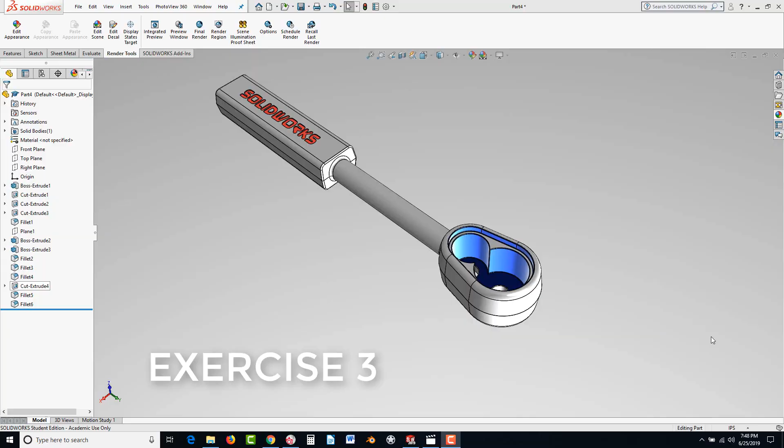Exercise 3, SolidWorks 2019. In Exercise 3, we're going to work on this forged ratchet body. Some of the features we're going to see are adding draft, as well as offsets, and making some additional features on here that you'll see, and some more filleting.

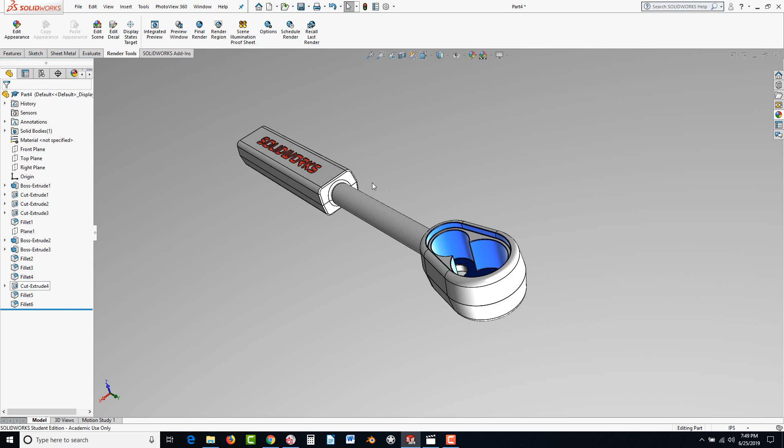So let's begin. First of all, this is what it's going to look like when we're done. We're going to start off creating the head, then we'll create the transition section. With that, we'll learn how to create a plane by offsetting one, and then we'll create the handle.

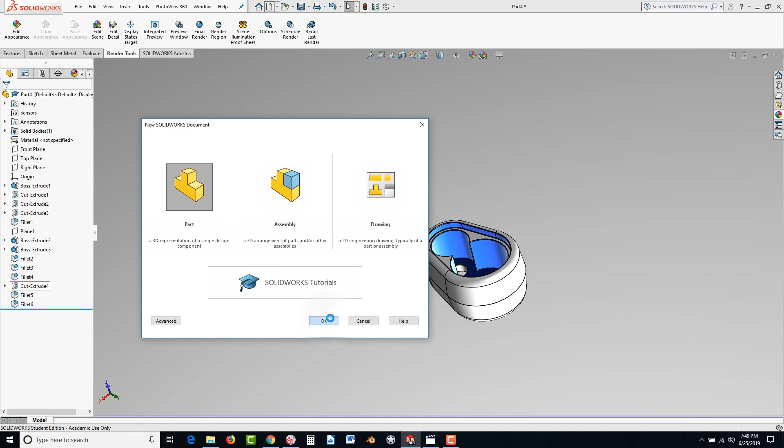Start off with a new part file. So go to New, Part, and hit OK. Select the front plane and start a sketch.

Select the centerline tool and glide over the origin. Click and drag up a vertical centerline about 1.5 inches in height, and then hit Escape on your keyboard. We're going to use this to mirror across the geometry.

Now, to make that head, most people draw multiple circles, draw the lines in, make them tangent, and snip it. This is going to be an easier method that I'm about to show you. Select the line tool, glide up to the left of that centerline, but don't infer to it like this. You want to get to the left of that a little bit, click, and drag a 1-inch angled line across like this. Make it look like mine if you can, then hit Escape.

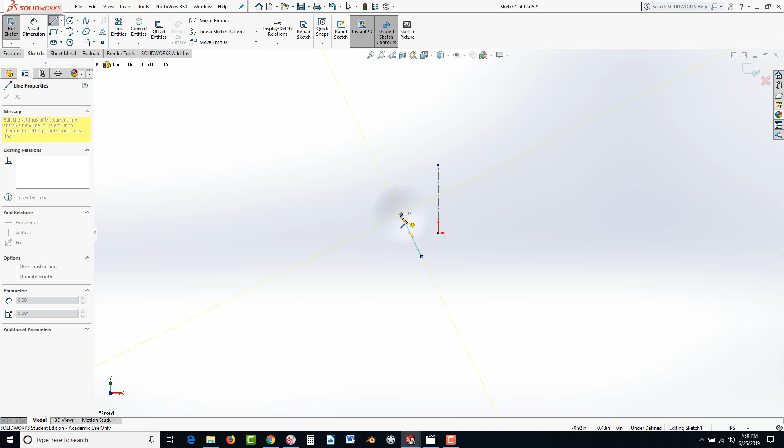Now, click and drag a fence to surround the geometry, so everything is selected, and use mirror entities. Again, we learned about mirror entities in Exercise 2.

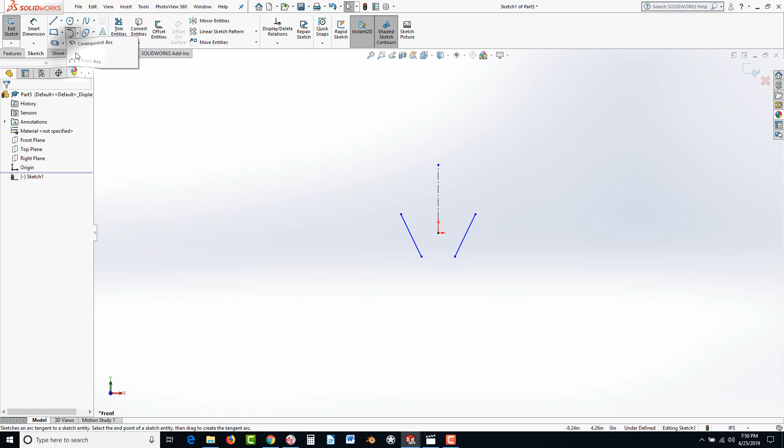Now I'd like to introduce you to the Tangent Arc tool. Find Tangent Arc, click on that. Tangent Arc automatically creates an arc tangent off of an edge, and you could snap it to another edge. We'll do that again over here, and get to this vertex, and once you get the orange dot, make sure you click. If you do it a little too quickly, sometimes you might leave a gap, so that leads to sloppy modeling.

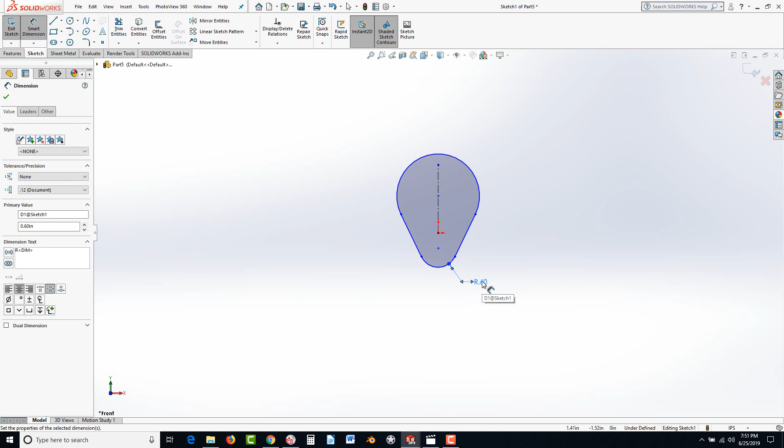So take your time, make sure you see the orange dot before you go ahead and click. Hit Escape. Go to Smart Dimension and dimension the bottom arc first. Actually click on the arc, not the center point of the arc. Move your pointer to the lower right, just like I'm doing here. Click and type in 0.6 and hit Enter. Now go ahead and click on this arc at the top, drag it up to the upper right corner just like mine, click and make that 0.75.

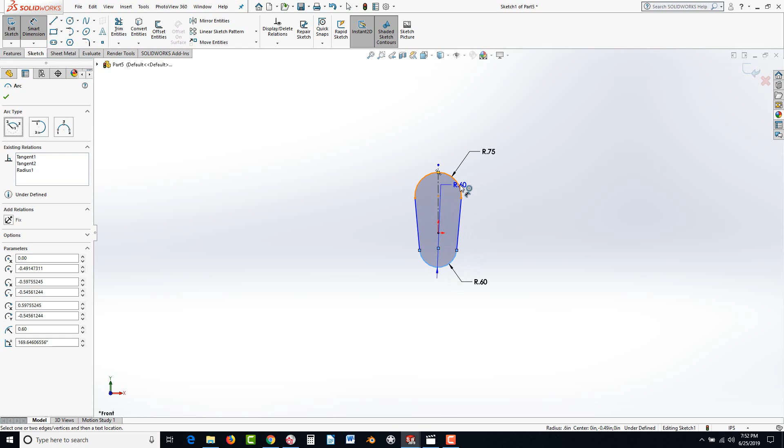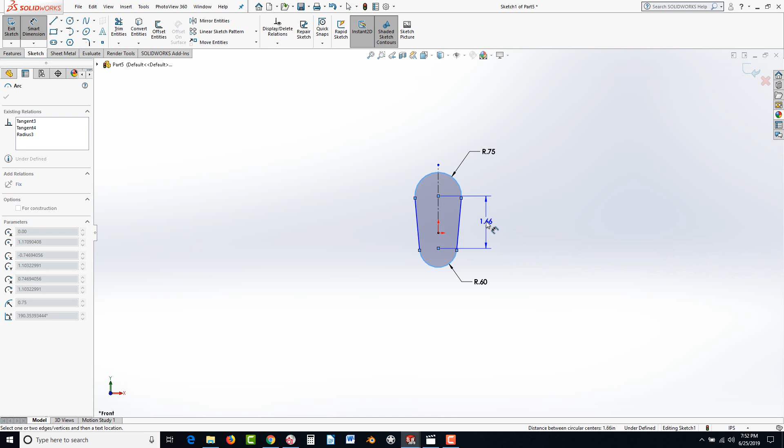Next, you could either click on both center points of the arcs, or click on the arcs themselves, but stay away from the midpoints of them. Click here, and here, when they turn orange. Move your pointer to the right and you'll see it should be dimensioning to the centers. If not, you can adjust it, but I'd like you to practice. Hit Escape if it doesn't work and try again, or just select the center points. Be careful not to select the origin, since our center point isn't aligned to it yet. Make sure you get the dimension between the extension lines, make that 0.75, then hit Escape to exit the dimension tool.

Let's hit F on our keyboard for Zoom to Fit. Now what we want to do is snap this bottom point of this arc to the origin, because the origin is our anchor point. It's a good idea, otherwise it just kind of floats.

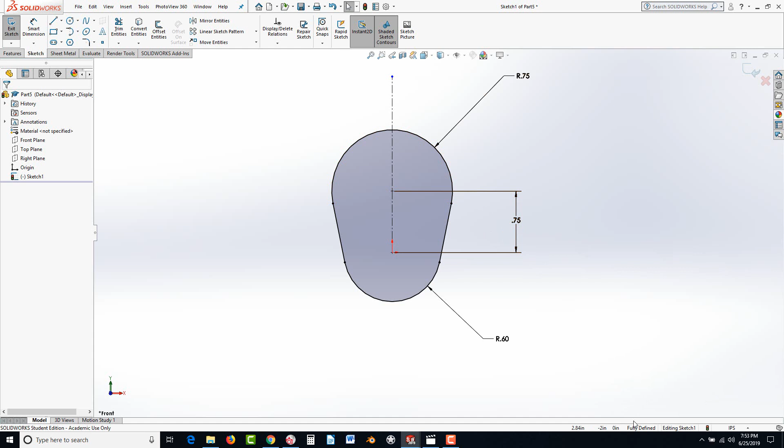In fact, if you grab that center point with your mouse button depressed and drag it down, you'll see it's floating. Go ahead and drag it up and let it snap to the origin. If it's not a very far distance from the origin, zoom up closer, because SolidWorks doesn't pick up on very tiny little moves, it just assumes you're not moving it. So be aware, make sure you lock that in. Once it's locked in, you'll see it all turn black, meaning it's fully defined, and you can see down in the lower right it says fully defined.

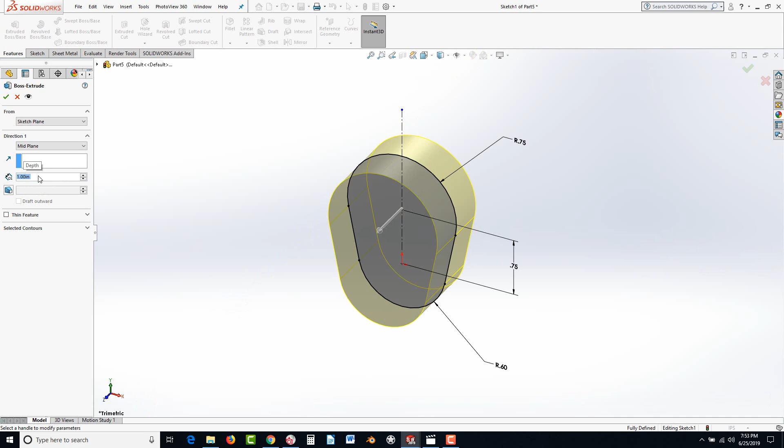We're ready now to go to Features and Extruded Boss Base. Instead of blind, let's have it go mid-plane and set it to 1 inch thick. Oops, I accidentally hit 11 inches, didn't want that. Just type in 1 and hit Enter, and you can see it's extruding on both sides of the plane.

Now, what are the advantages to extruding on both sides? Well, with symmetric parts, as I discussed earlier in Exercise 1 and Exercise 2, it's great to lock everything into the origin. You have planes to mirror across, as you saw with our ribs in Exercise 2. So there's definite advantages to take advantage of.

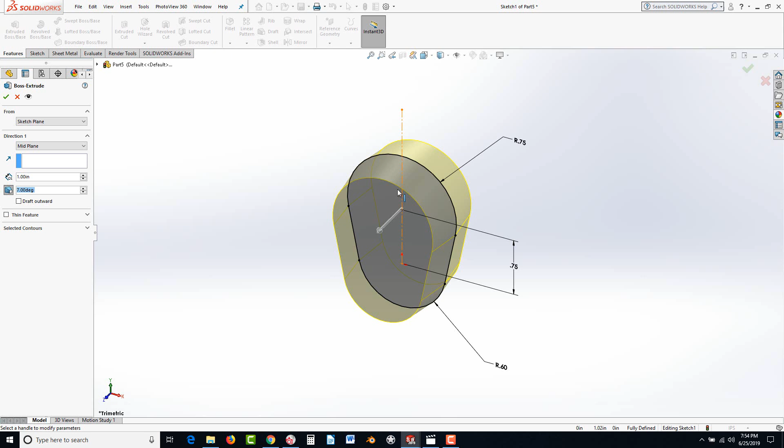Now we're going to add draft. Go ahead and click on draft on, and either type in 7 degrees or bump it up with the arrow key to the right, and you'll see that it's adding draft while it's extruding. Now it's getting smaller.

Note that if you turned on draft outward, it would get thicker. But turn that off—we don't want that.

This is for a molding process, or in this case, a drop forging. Imagine an ice cube tray—you'll typically not see one without any draft applied. That's because once the ice is solidified, you try to break it away. If it were flat on all sides, it wouldn't come out easily. So they add draft so that as soon as you move it a little, it comes out easier. That's what they do with plastic parts as well as cast metals.

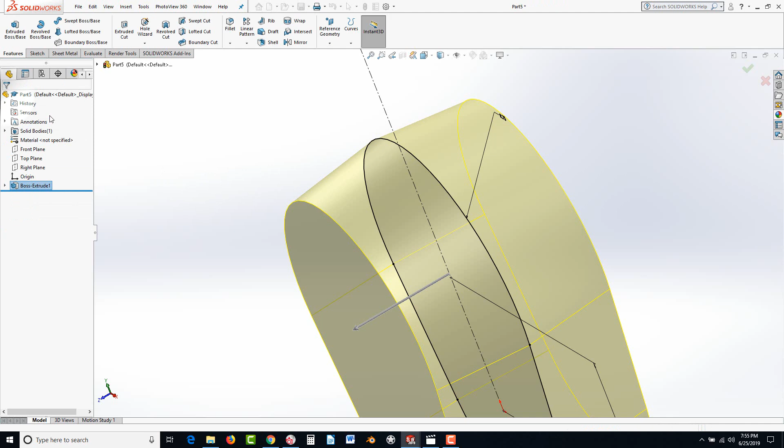So let's go ahead and hit the green check mark. Hit your spacebar, go to isometric, and click somewhere on the screen.

Now we're going to learn about the offset sketch tool. First, we have to start a sketch, and we're going to sketch on this surface. Click on the surface and start a sketch. While the surface is still selected, it will pick up on the topology when we go to offset entities. Find offset entities up here, click, and type in 0.125, but then check the reverse box.

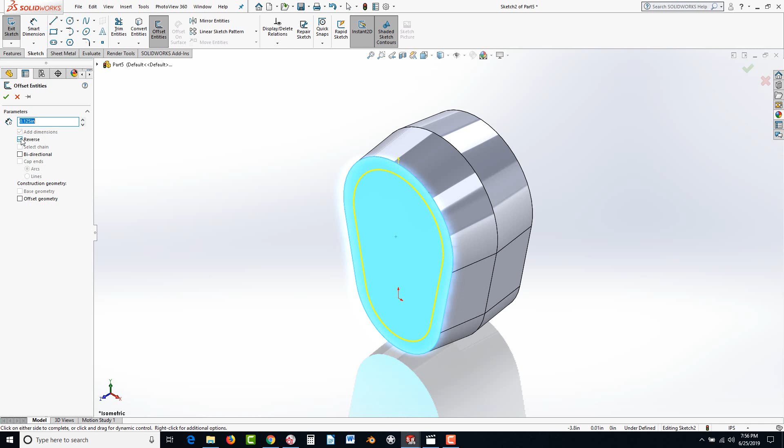It's very rare, like with some of the older CAD systems, to be able to put in a minus or negative value. In SolidWorks, there's usually just a flip switch, so you don't have to deal with negative numbers typically, though in some cases you can. Anyway, make sure the reverse switch is checked, and you'll see the preview in yellow. Go ahead and hit the green check.

Now, what we're doing with this offset is making a recess into the part for a cover plate. So let's go to Features and Extruded Cut. We're going to remove the material—0.125—and hit Enter. Go ahead and hit the green check mark, and now you have a recess.

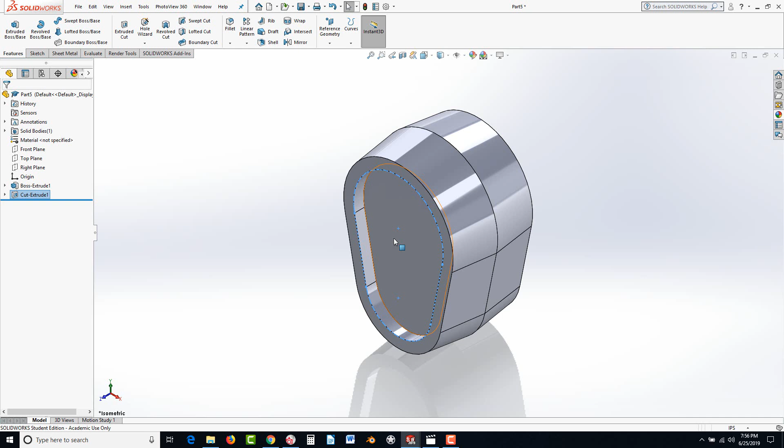Now, the floor of that recess will have a reduction gear—a gear inside there—in an assembly later, not in this lesson, along with some mechanisms essentially inside there. So we have to make some cutouts, a pocket per se. Click on that face on the floor and start a sketch.

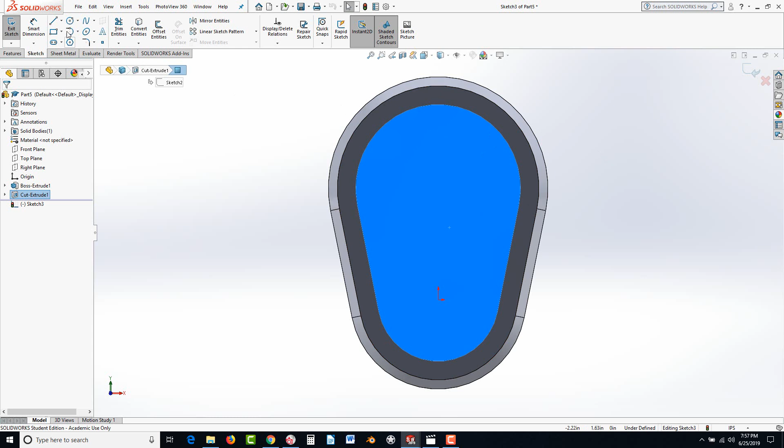Now let's hit our spacebar, and I'd like to select normal to, just to get the hang of it. What normal to does is bring you normal to whatever surface, no matter what angle it's sitting at, making it very easy to sketch planar to the screen.

Let's go to the circle tool, and we want to find the center—that's the origin right there. Click and drag out a circle about 0.35-ish. Click. Now you'll notice there's no center to lock in up here.

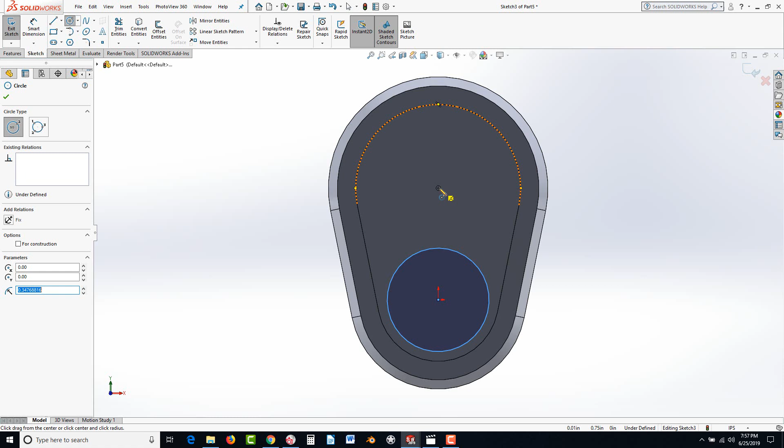It is inferring to a quadrant, but that's not good enough. Here's what you do: move your pointer to one of the arcs or radiuses at the top—could be any of those—and let it float there for a moment. A second or two later, you'll see a center point appear. Move your pointer away from the edge, and now you can go to that center, click, and drag out a circle.

Your circle's radius should be about 0.55 or something like that, or 0.6 if you want. That might be a little too big, but go ahead and click.

Now we're going to take a look at the trim tool—we briefly looked at it in the last exercise, but let's give it a shot again. Go ahead and click on Trim Entities. Now you'll see there's a variety of tools. Two of my favorites are Power Trim and Trim to Closest. Let's try them both. First, let's go with Trim to Closest.

Trim to Closest enables you to hover over whatever geometry you don't want, and it will automatically trim up to the next intersections. As I'm hovering over this particular edge, it's highlighted in a magenta color, and that's what's going to be removed when I click. So go ahead and click.

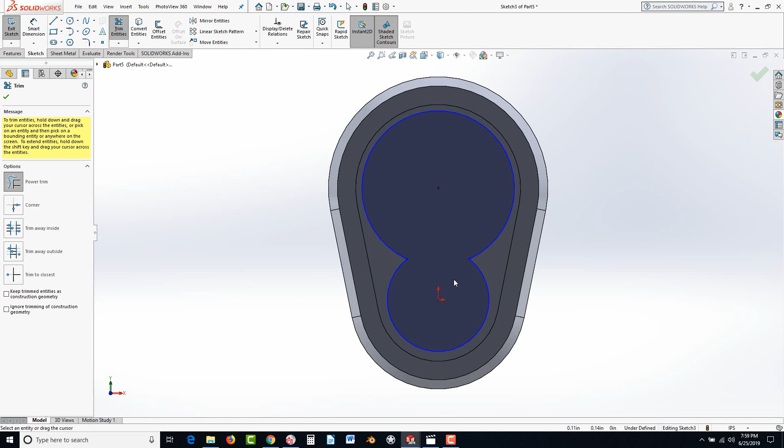Now let's try the Power Trim. Go ahead and select Power Trim. Power Trim is great for multiple profiles that you're trying to cut, so in this instance it's not really necessary, but it is a nice tool. Simply move your pointer up here somewhere floating and click, and notice as I'm holding down the left mouse button, it's scribbling through, and watch as it removes whatever it touches, cutting it up to the next intersection, or trimming it up to the next intersection. So those are two very nice tools to select. The other ones in between can be useful for patterns and such, but we're not going to go over those in this segment. Go ahead and hit the green check mark.

Now go to Smart Dimension and click on this bottom arc. Click to drag it out and drop it. Click again and type in 0.35. Now notice that's a radius, and if this is going to be machined, it might be healthy to actually have the diameter so they could pick an end mill and a reamer and so on for the proper size. And with that, you could always change it pretty easily. Notice it says 0.35 radius here.

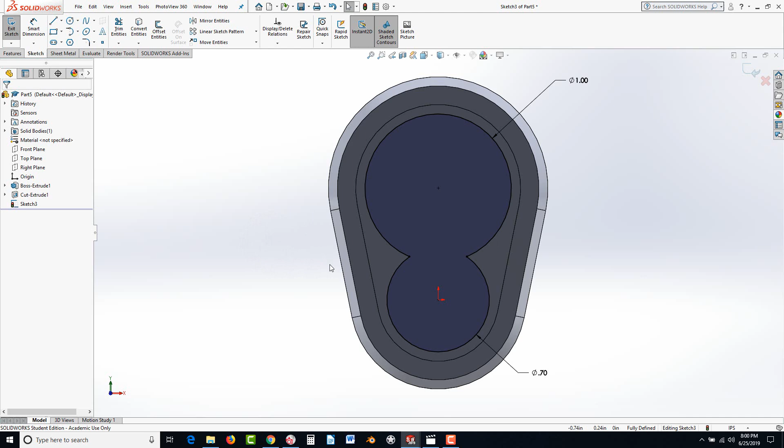Go to the far left side and go to Leaders, the tab up here, and you'll see the option to change it to a diameter. It automatically doubles it up, and you're ready to move on to the next. Go ahead and select this arc now, drag it up to the top, click, and type in 0.5. And again, if you wanted to change it to a diameter, go to Leaders over on the left, and change it to diameter. Hit the green check.

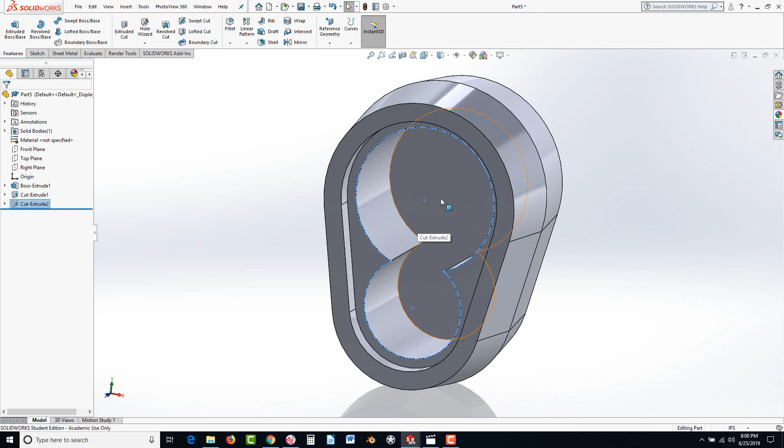Now rotate it a little bit, and let's go to Features, and go to Extruded Cut. We want to cut this at a depth of 0.7. And there will be no draft because this is a machined entity. So hit the green check.

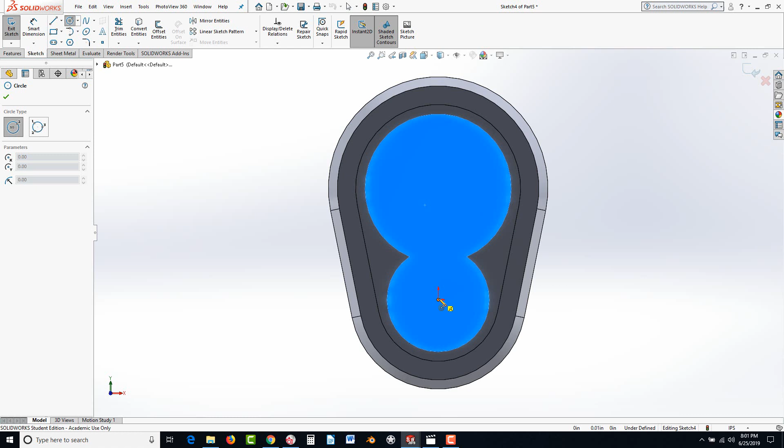Now the floor of that pocket that we just created, let's go ahead and click. We're going to put some through holes in there. So select this face, start a sketch, and again hit the space bar, and you could go normal too. But if you like, you could hit Control 8 - that's the fast key, some of you like fast keys. Go to the circle tool, and we're going to draw holes.

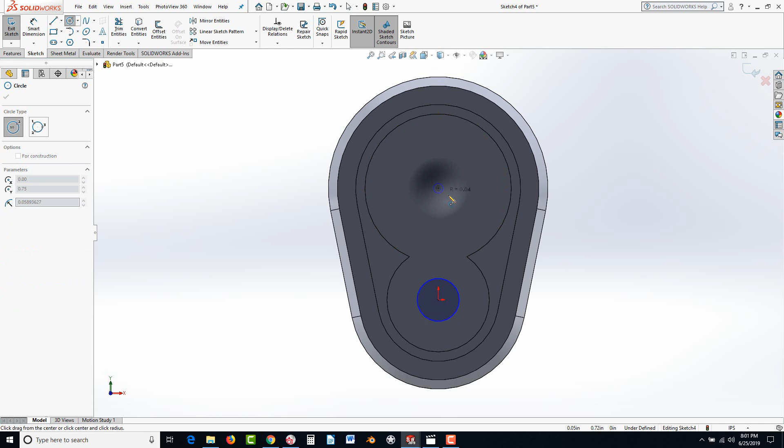Now there is a hole wizard, but we're not going to learn that until the next exercise. So glide up to this point, drag this out, click to drop it. Don't worry about the size too much. Now this one over here, again we have trouble finding that center, although it did pick up on it pretty well. If you don't get it, remember the trick is to get to the arc and let your pointer hover over it for a moment, and it will show up. Click and drag this one out and hit Escape.

Now go to Smart Dimension and dimension the bottom circle, and we're going to make that 0.35. Now we want to make this one equal to it. So rather than adding another dimension, let's have it controlled by one and hit Escape, and we will use a relationship as a substitute for a dimension. We'll make these two equal.

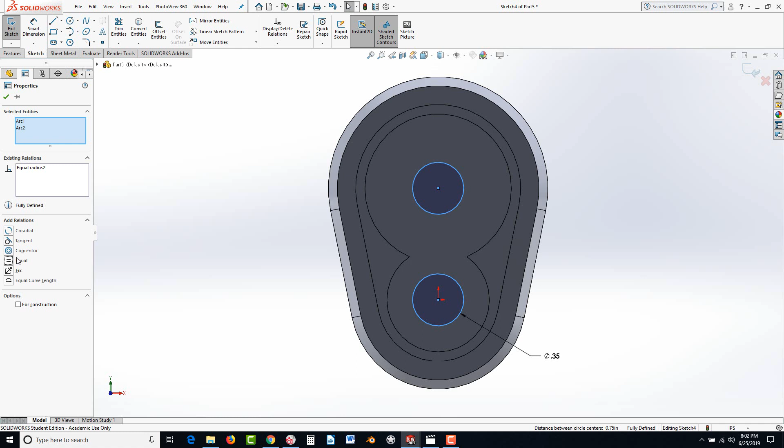The way you do it: after you hit Escape, hold Control, select this circle, and then select this circle. On the left, it will give you a series of options for constraints, or as they call it, relationships, and we want equal. Don't go with concentric - that will put them inside of each other, or we'll try, it will actually fail. But hit the green check. And now one dimension controls both.

Now note that in here, you could go ahead and click on the extension line of the dimension, and on the left you get some options. Now we've seen this before with the diameter symbol, but we could also click in here and either type in x2 for 2 times, or we could actually write a note, PLCS, period, for places, 2 places, or whatever you want to do. And you could also put in tolerances.

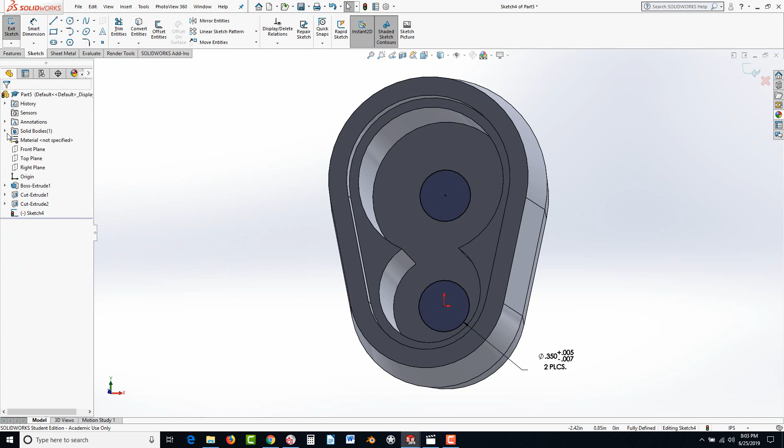So like over here, you have the ability to go with basic, bilateral, limit, symmetric, min-max, fit. And you could put the precision you'd like in decimal places and what you would like to see on there, plus or minus. And there we go. So you can change those things pretty easily and add them, so later on when you detail the print, they come up automatically.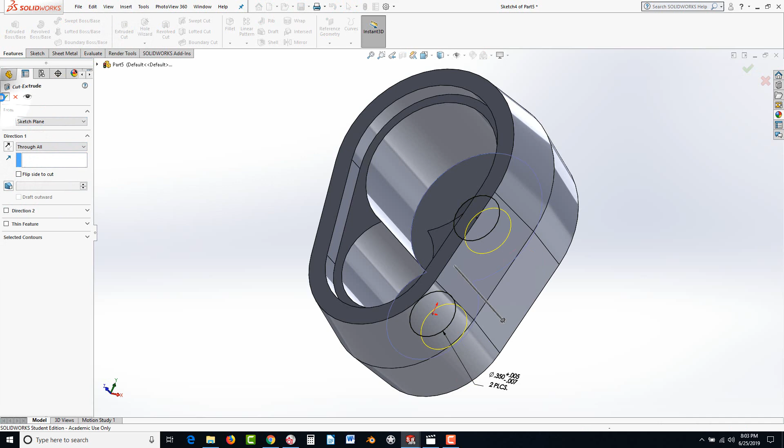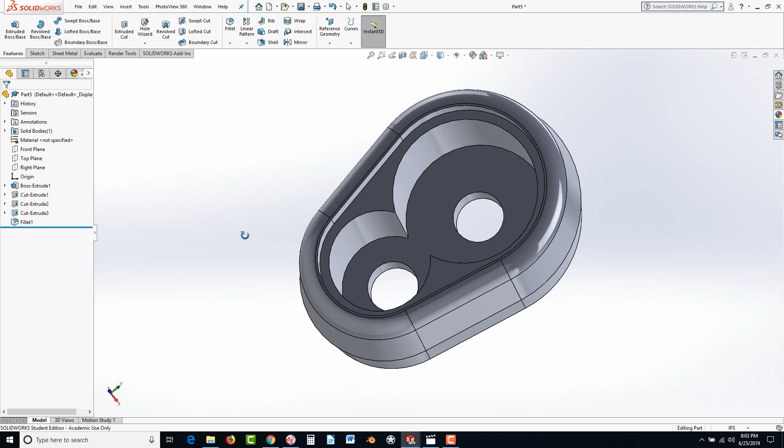Now with that, let's go ahead and go to Features and Extrude Cut, and just select Through All. Let's add a fillet. Go to the Fillet tool and type in 0.125, and select this edge right here and this edge at the bottom.

When you see the preview, hit the green check, and now we're done with the head.

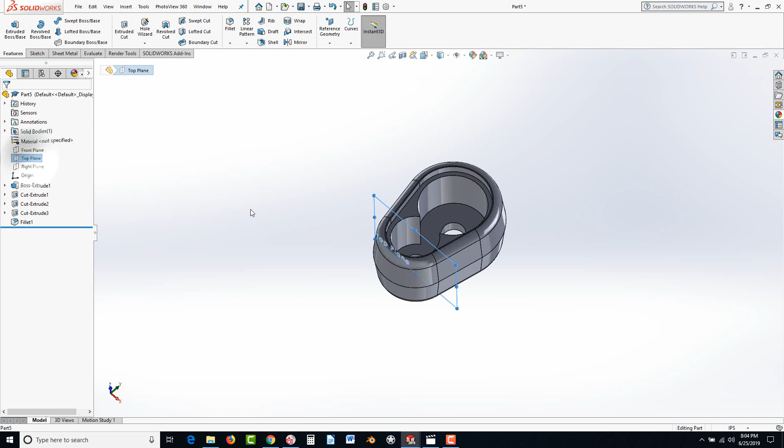Now what we want to do is create a transition section to connect the handle to the head. It's nothing more than a rod that's 4 inches off from center. Rather than take a plane inside here and draw a circle, because that will leave a fragment inside, we're going to learn how to create a plane.

First, select the plane you want to offset from, and that's going to be the top plane. You can see it intersects right at the bottom. Now go to Reference Geometry up at the top here, and Plane. You'll automatically see it's going to start offsetting one.

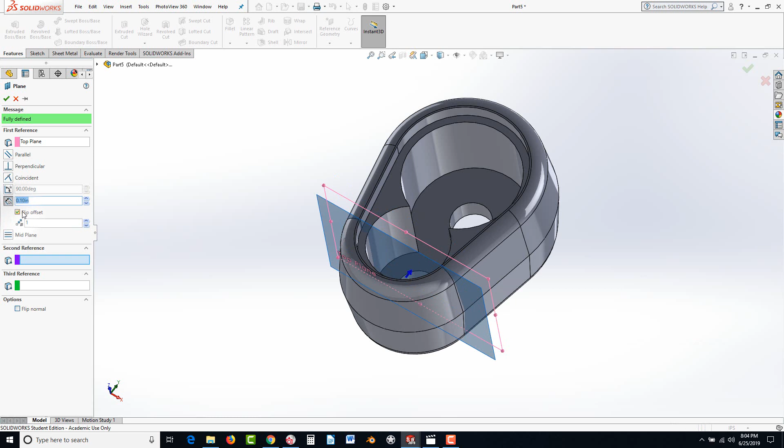You could grab the arrow and flip it, or drag it down, but I'm having a difficult time, so instead I'm going to go over here to the offset and flip it. Flip offset, there we go. We want to type in 4 inches and hit enter. Now if you zoom out, you'll see the preview down below, and that's exactly where we want it.

Hit the green check. Now if you create a plane that you don't like, or that's not being used, click on it and hit delete, or hit undo here. Now we have a plane that we could sketch our rod on, or at least the diameter of it.

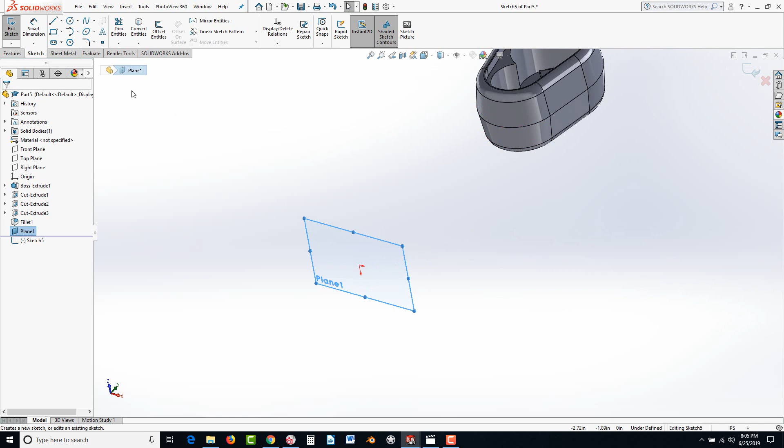So click on that plane, on the edge of it, and go to Sketch. Rather than going normal to, we could actually just draw our circle there. Go to the Circle tool, and at the origin, when you get the orange dot, click and drag out a circle. Go to Smart Dimension, and dimension it at 1/2 inch, so 0.5.

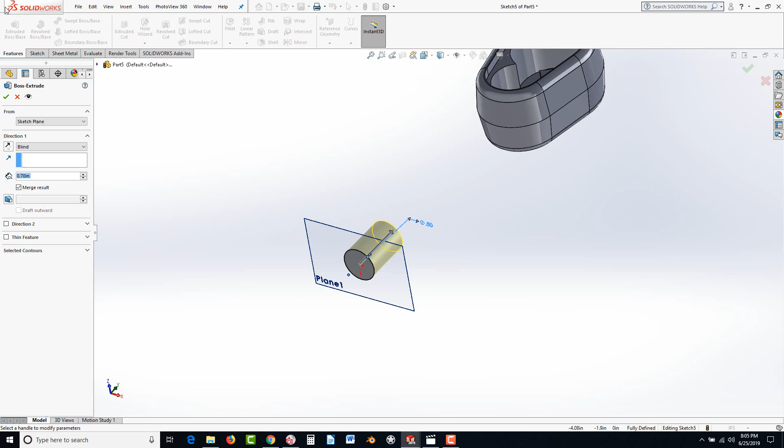Now you could go to Features and Extruded Boss/Base. One of the reasons I had you keep in like an isometric view, or from this angle, is because I want to show you this next tool. Now we know if we drag this out and extend it with the ruler, we could get it pretty close and maybe not intersect too much into the model. But rather than having to do that, there is something better.

In our little area here, hit the little arrow to the right of blind, and you'll see some options: up to surface, up to body, or up to next. The difference between them is that up to next will just go up to the next volume and connect to it and become one. Up to body will keep them separate, but it will still touch it. The up to surface would allow you to only select one surface—singular, not plural.

In this case we have a split surface this way and that way. We'd only be able to select one of them, and then we would have a gap underneath, so we don't want that. So up to next is the best option.

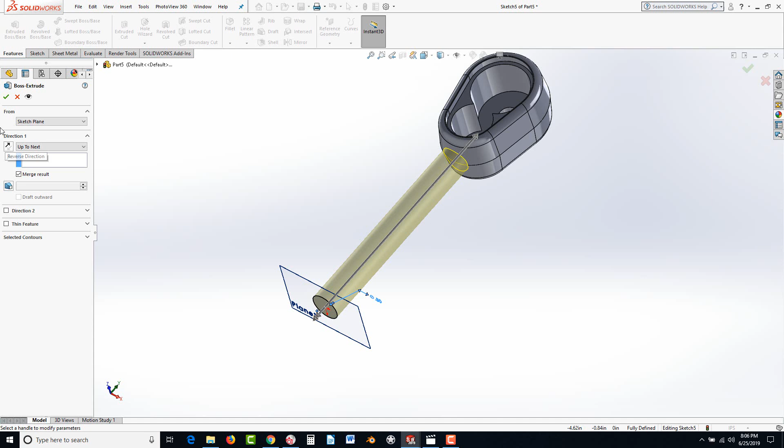Now if up to next doesn't appear, that usually means you just have to flip the direction right over here, because you might actually be extruding in the wrong direction and it doesn't see anything in front of it to go up to. So hit the green check mark, and now it's merged, it's combined, and we're ready to move on to the next.

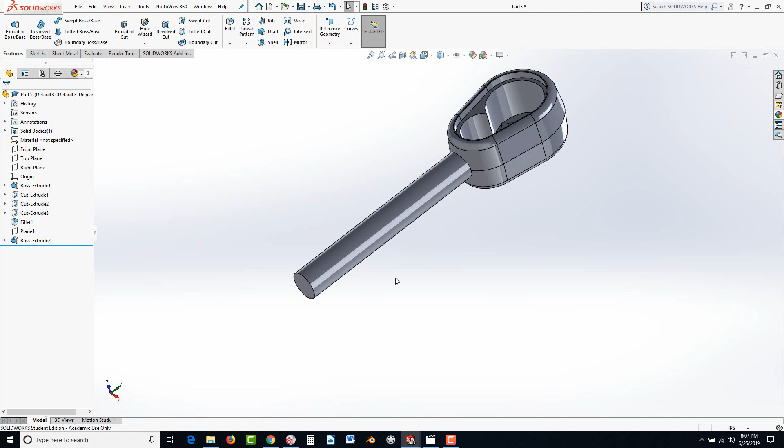Now let's hide this plane. Click on the plane and find the eyeball here, that's hide. You could do that with anything on here, but don't do it to your solid typically. Then you have to go to the feature tree and select one of the features, and find unhide by selecting the same eyeball.

Now we're going to add the handle. Select the front plane once again, start a sketch, hit your space bar, and go to the front view orientation. Proceed to zoom out with your wheel a little bit, keeping your model centered, maybe move it up a little bit. You could hold Shift to zoom in and out with the middle mouse button, or Control to pan with the middle mouse button.

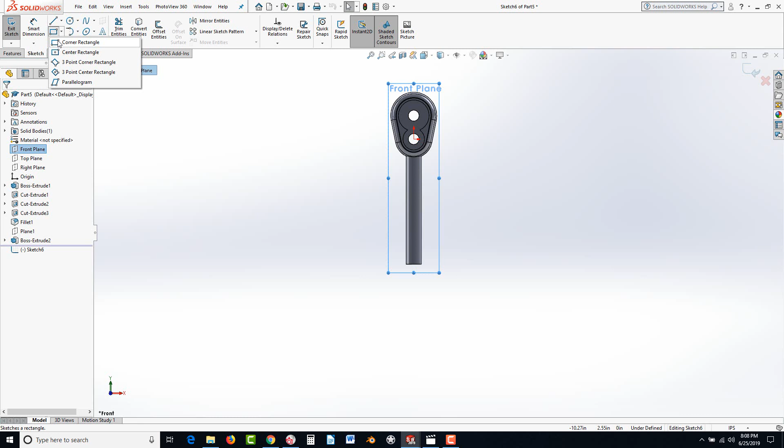Now we're going to do something a little unorthodox here. We're going to draw this to show you some of the capabilities, especially for conceptualization, and how easy it is to move things around inside SolidWorks. We're going to go to the corner rectangle, and I know some of you are thinking, well, use the center rectangle, then you can center it. We could, but let me show you another technique so you can see how these relationships and constraints work.

So go to corner rectangle, draw over here on the right, click and draw out a rectangle, or an imaginary handle. Go to Smart Dimension, dimension it at 4 inches in height and 1 inch wide.

Proceed to find the center line, click on the center line, and find the midpoint of this box. Draw up a vertical line, click and hit escape. Let's go back to Smart Dimension and dimension that vertical line 3.75. Now hit escape on your keyboard.

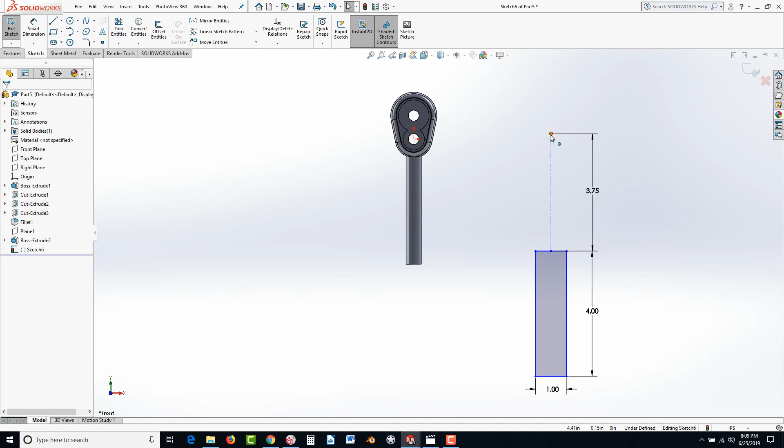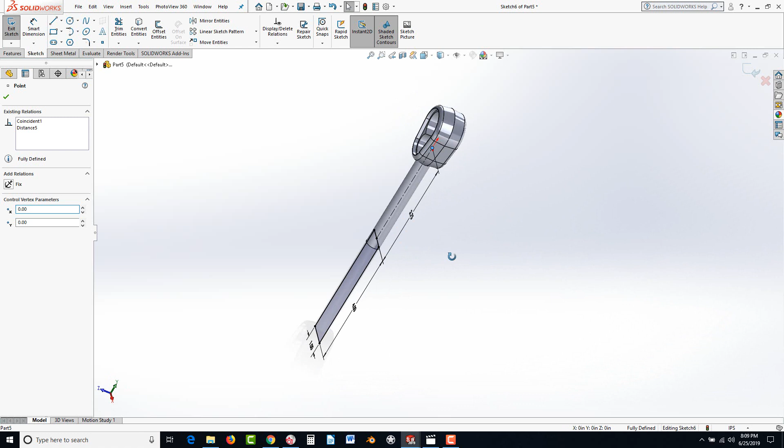Now everything is very flexible still, especially when it's blue, or most things are, unless they have dimensions on them. But watch what we've just done. Grab, after you hit escape, grab this vertex at the top of the center line, hold it down with your mouse button, and proceed to drag it to the origin. When you get the blue dot in the center, release it. You've just centered your rectangle for your handle.

Could we have done it with the center rectangle? Absolutely. Just wanted to show you a different technique.

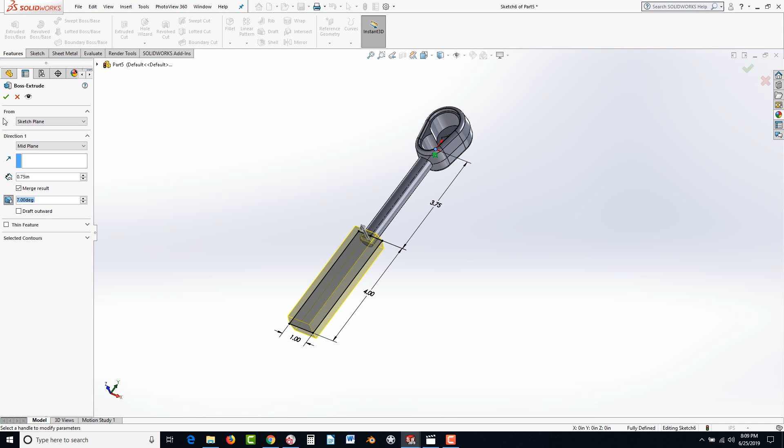All right, now rotate this a little bit. Let's go to Features, Extruded Boss/Base. We're going to make it via mid-plane, and it's only going to be 0.75 thick. And don't forget to add draft. When you click on the draft tool, you'll see 7 degrees automatically enter in there because that's the last one we used. Hit the green check. Click off of it, and we're almost done.

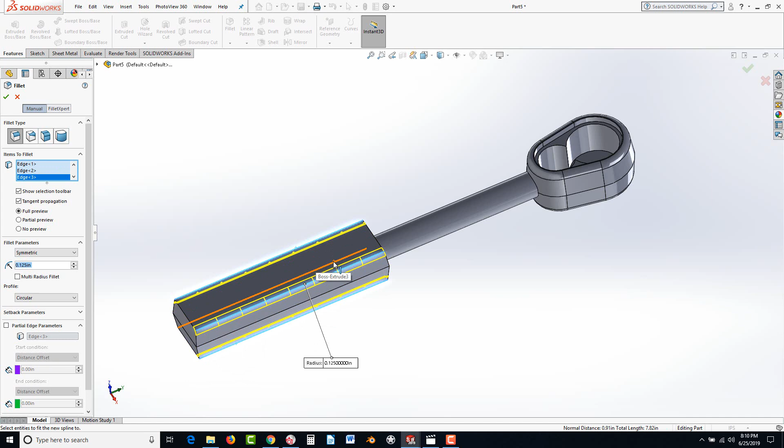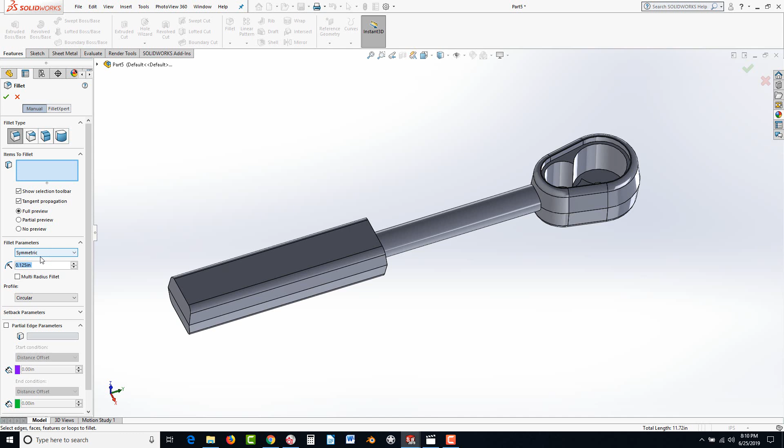Now we're going to go ahead and add some fillets. So go to the fillet tool, and we want to add a fillet on this edge, this here. Notice we're still at 0.125. Keep it at 0.125, this edge here, and use your X-ray vision to get this one on the backside. If you can't determine which one it is, just rotate the part around and get this one. Avoid selecting the parting line in this instance, although you could. Go ahead and hit the green check.

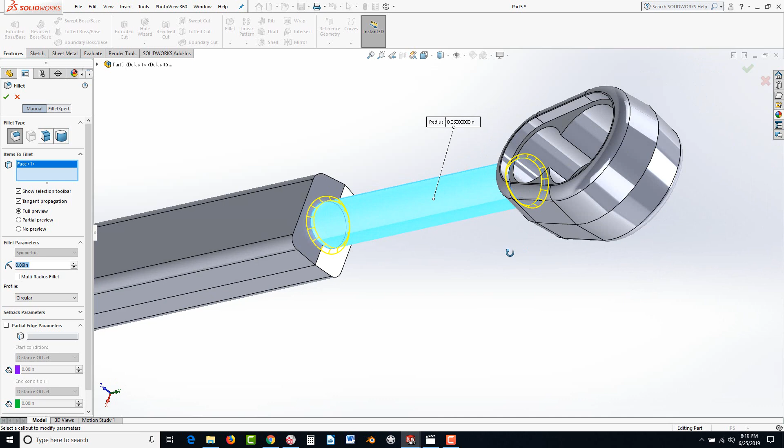Now go to the fillet tool and let's set it to 0.06. Hit enter. And we want to fillet every edge off of this cylinder. Very simple. Instead of selecting all 4 of those edges, select the actual cylinder itself. It automatically takes the topology and puts a fillet in the intersections, provided it could fit it in there. And in this case it can, and we can see a nice preview. Hit the green check.

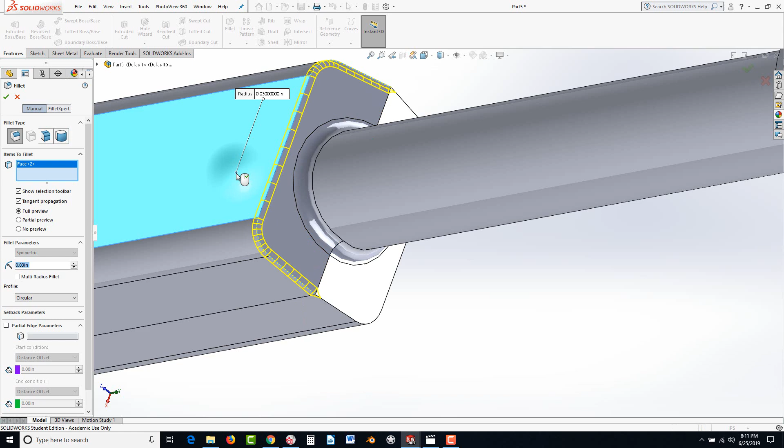Go to fillet again, set it to 0.03 and hit enter, and proceed to select this face. Now, if you select that face, it's going to add a fillet there. So let's select the face to deselect it. Select up here, and it adds it, and it propagates around. Or you could just select this edge here, or any of these edges, and it will propagate around. Don't forget you have to get the bottom as well. And hit the green check.

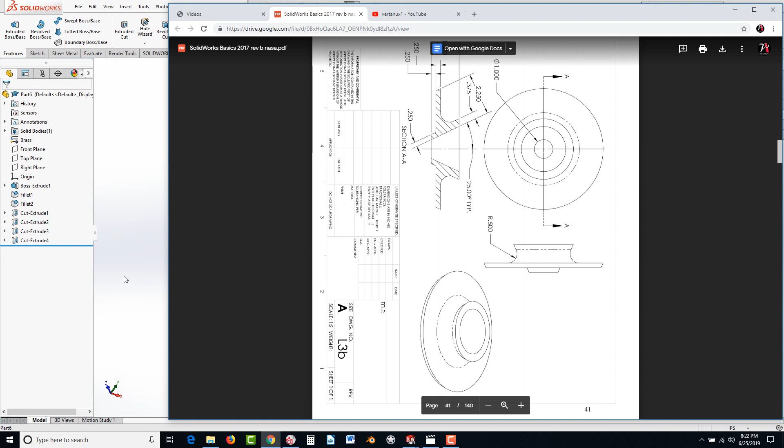Now to add text. On your quiz, I showed you one way to add text, and that's pretty much if it were on an arc. Let's say we want to add straight text, and we're going to put our name on this handle. Select this face, start a sketch, hit your space bar, and go to the front view orientation. If you'd like, if it's easier for you, hold the Alt key and the left arrow key and hit several times until it goes full 90 degrees.

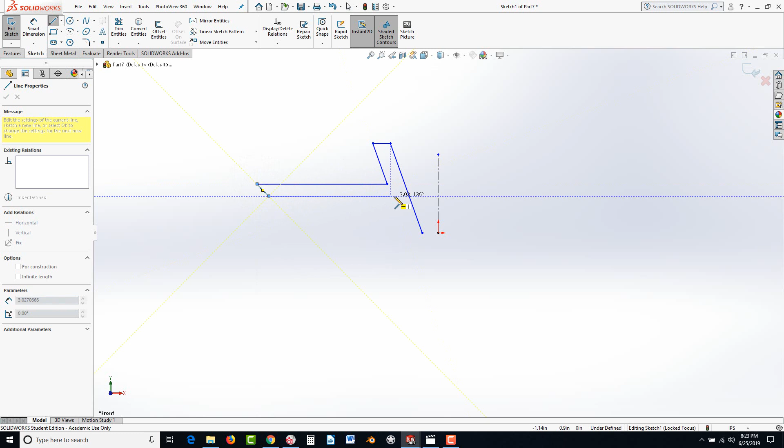Clockwise. Now, take your centerline tool and glide up to the handle here just by zooming with your wheel. And down here somewhere, a little off from the edges, click and draw a line across. Now, you don't want it centered, because if you made it centered, your text is going to rest on top of the line, so your text would be off center. So you're just going to eyeball it here, but you could add dimensions and locate it with precision. We're just going to have a little fun here though.

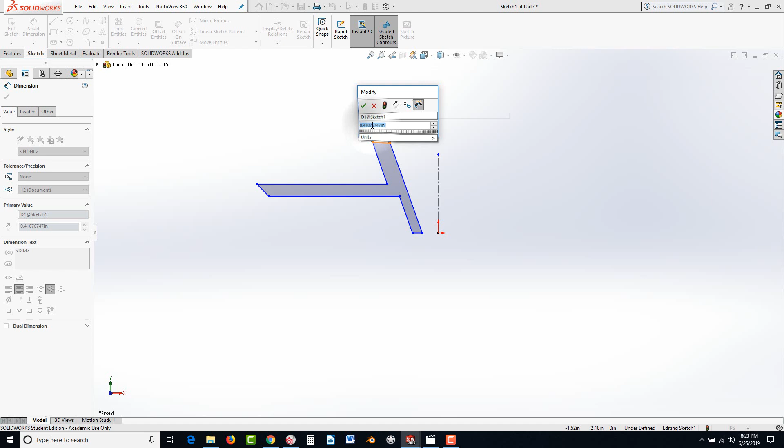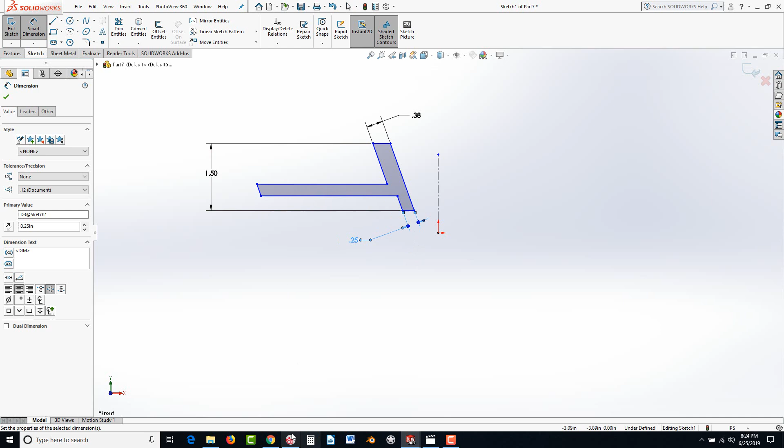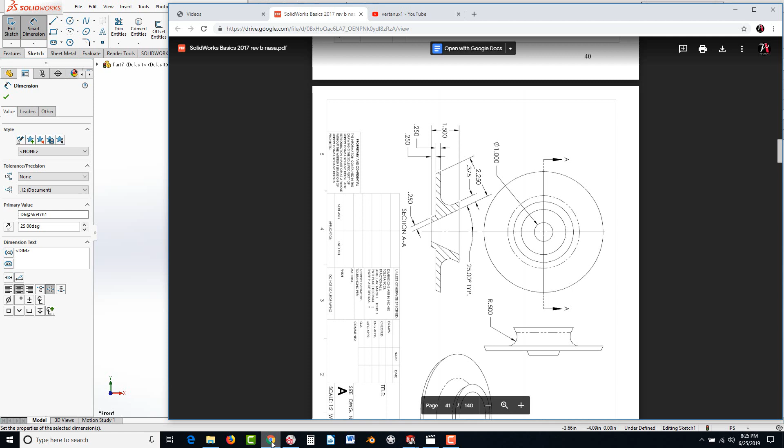Go to Features, and Extruded Cut to engrave it. The depth of the engraving can vary, but maybe make it 0.01 or 0.02. So 20 thousandths. Hit the green check, and now you have your engraving.

If you'd like to actually add color to it, simply select the floor of any one of those letters, go to the beach ball and hit the little arrow to the right of it, and if you want the whole text, go to Cut Extrude 4, and instead of selecting a new material, which you could do, you could just go over here and change the color to whatever you like.

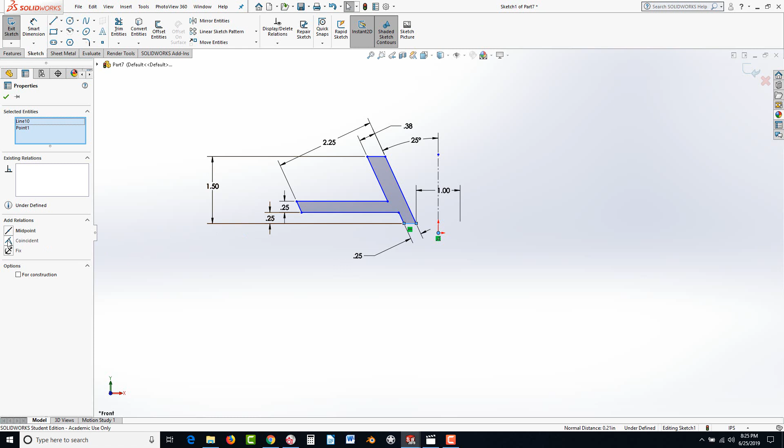So that finishes exercise 3. Let's take a look at the labs now.

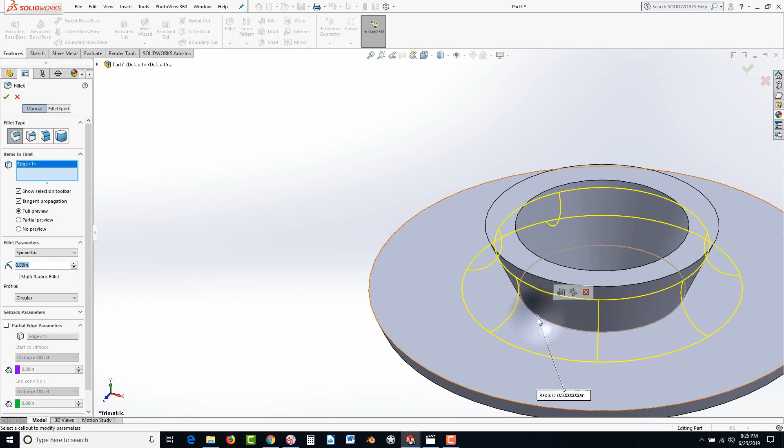If you are working in the class on this, my recommendation is to actually pause and try to build these on your own, then go back and watch how they're done. So here we have L3, and L3 is very similar—it actually incorporates almost everything we've learned in exercise 3 to make this. There's just some subtle differences.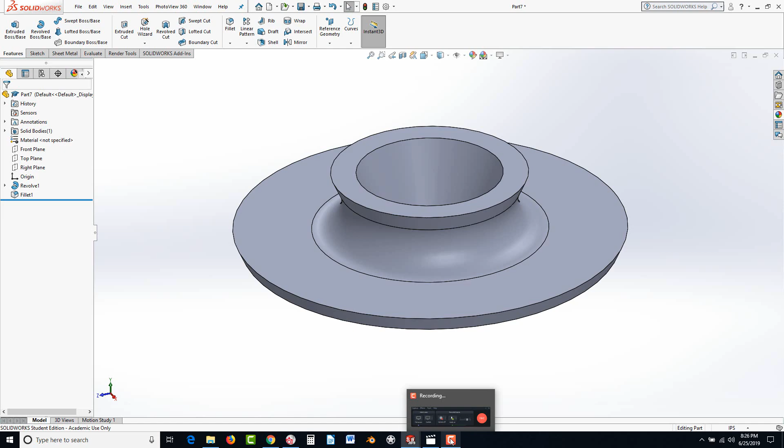So let's go ahead and try this out. Go to New, Part, and hit OK. Select the front plane, start a sketch, and use the same strategy we used earlier when making our head of the ratchet. Go to centerline, draw a short little centerline, about 2 inches. Go to the line tool, lower left, little offset from center, click and drag a short 1-inch line at a slight angle. Hit Escape.

Click and drag a fence to surround both entities, and go to Mirror Entities. Now use Tangent Arc for just the bottom. Don't use it for the top.

Hit Escape. Now for the top, you'll see that these are flexible—you can click and drag that. The top, you actually want to use 3-point arc. Click here, and then drag it out. Notice there's no tangency—it actually looks like it's going beyond the extents. That's what you want for this one, for the top only. You don't want tangency for the top.

Go to Smart Dimension, dimension this bottom at 0.6, and then dimension the top at 1.5. Dimension between centers—remember, you could select this arc, stay away from the midpoint. You could do the center point, and click here, click to drop it. This is going to be 2 inches.